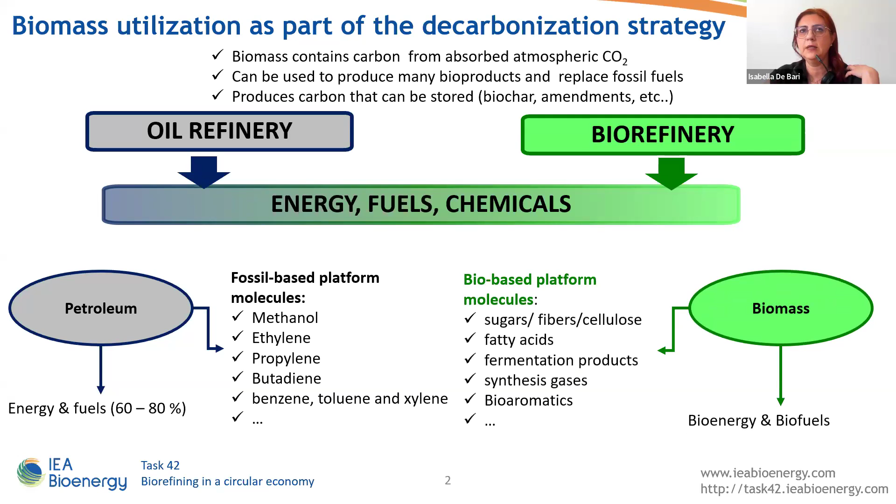In Europe, trajectories for biofuel derive from the Renewable Energy Directive and include the replacement in 2030 of 29% final energy consumption in the transport sector with renewable energy, with a share of 5.5% biofuel and 1% renewable fuels of non-biological origin, namely synthetic fuels produced from hydrogen.

Two EU regulations, the ReFuelEU Aviation and FuelEU Maritime, set also ambitious targets in terms of fossil fuel replacement and reduction of emissions. A similar push to increase the renewable carbon in chemicals and materials derives from the Green Deal targets, namely 20% of renewable carbon in chemicals and plastics.

Globally, approximately a quarter of renewable electricity generation would be used to produce the green hydrogen, around 200,000 kilotons per year needed by 2050. Hydrogen is included in many national strategies to decarbonize the industrial and civil sectors and also for green mobility. Considering the huge amount of hydrogen currently needed in the oil refinery, the use of hydrogen as chemical reactant could be similarly considered in biorefineries to convert many renewable carbon sources.

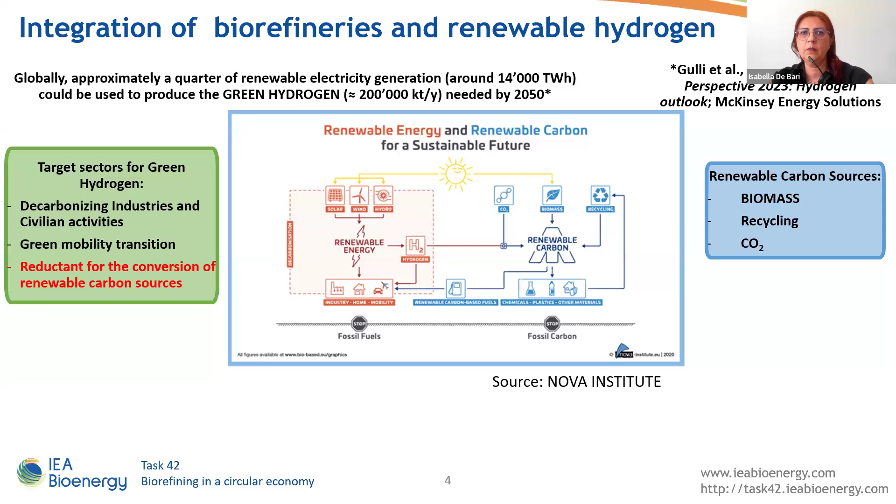One main issue in the decarbonization strategy through hydrogen is obviously the economic sustainability of the hydrogen production, storage, and transport costs. The major part of the hydrogen currently used in the industrial sector is produced through the steam reforming of methane, with a cost around €2 per kilogram. The combination of different electrolyzers with different sources of renewable electricity offers some options to produce green hydrogen with cost of at most 2 times higher than hydrogen from steam reforming.

Biohydrogen can be produced from biomass through many thermochemical and biological pathways, with production costs ranging from €3 to €6 per kilogram, depending on the final purity level. But if biomass can be a source of hydrogen, more interestingly, biomass and biomass-derived streams can be converted to many final bioproducts and downstream products by using green hydrogen, similarly to what's substantially happening in oil refineries. In fact, biomass contains 35 to 40% oxygen, and green hydrogen can act as a reactant to reduce the oxygen content, mainly through hydrodeoxygenation processes. One major question is in what condition the use of hydrogen in biorefinery can be sustainable.

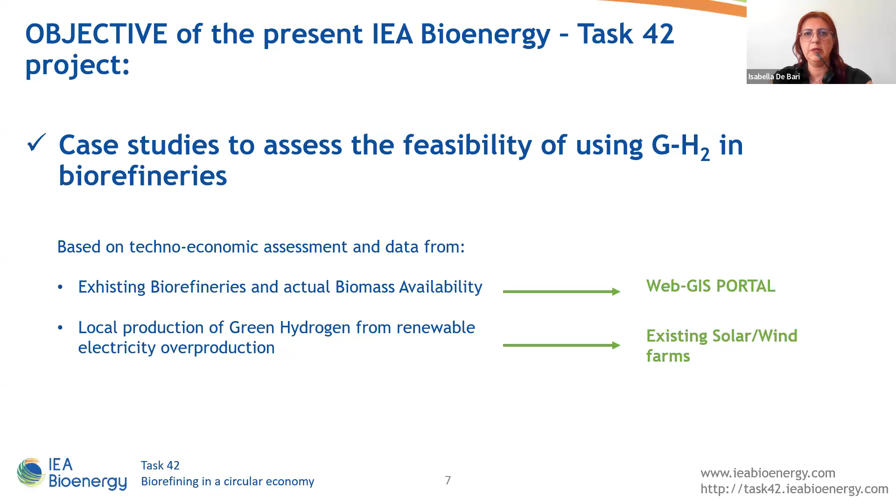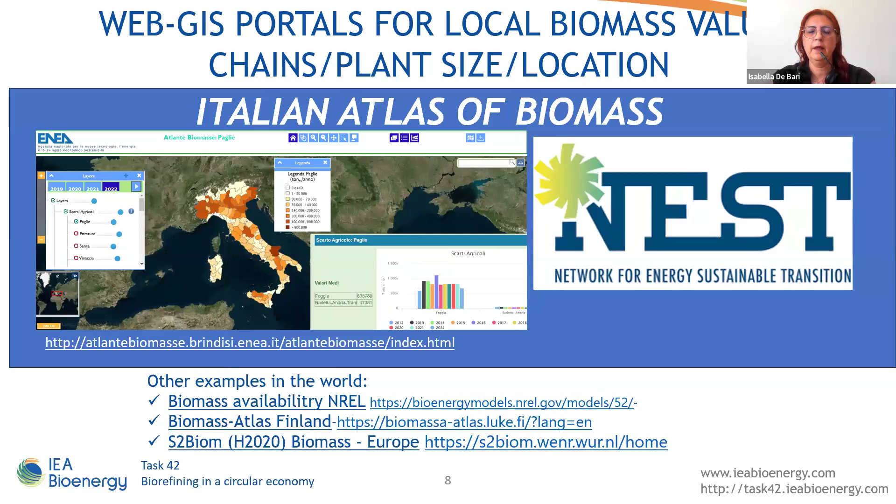The methodology we have developed is based on techno-economic assessment, and data were retrieved from web-GIS portals of existing biorefineries and the local biomass availability, together with the local production of green hydrogen from solar and wind farms. Several web-GIS national portals are available that could provide data on the local biomass supply chain for existing biorefineries or potential future plants. The global biorefinery portal that will be presented later in this webinar provides data on existing biorefineries: infrastructures, technologies, plant sites, location, feedstock, and product, and finally the status of operation.

1,119 plants are currently mapped in the web portal, and 76% are bioenergy, biofuel-driven biorefineries. At the moment, only 9% of the biorefineries based on chemical technologies in the database use hydrogen. So in conclusion, key elements of this webinar are: a georeferenced biorefinery database could be a dynamic observatory containing useful data to monitor these sectors and also to support the assessment of novel technological scenarios.

The current items include 21 plants using hydrogen as reactant, with sizes ranging from 200 to 1,000 kilotons per year, mainly HVO and SAF, and with a draft estimation of hydrogen requirement in the range 300-600 kilotons per year. Based on the biofuel trajectory at 2050, green hydrogen needed to produce drop-in biofuels and hydrogenated biochemicals would be at least 20-30 times higher than the current estimation for the plants included in the database.

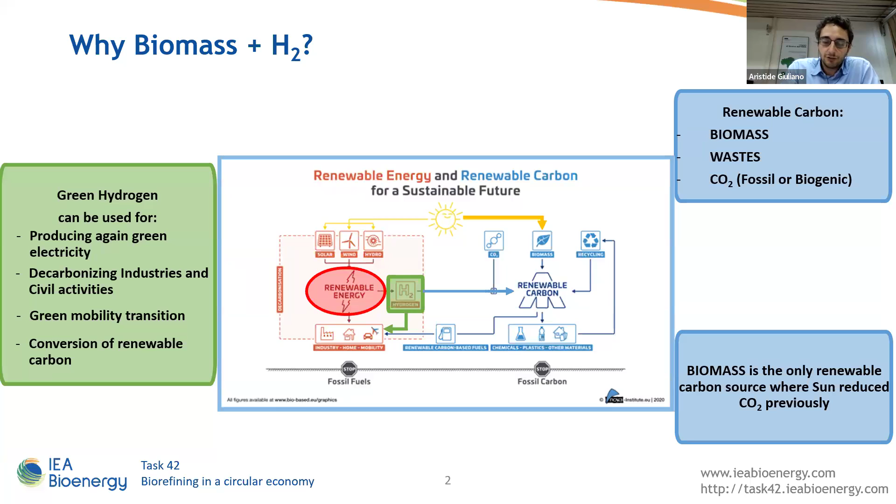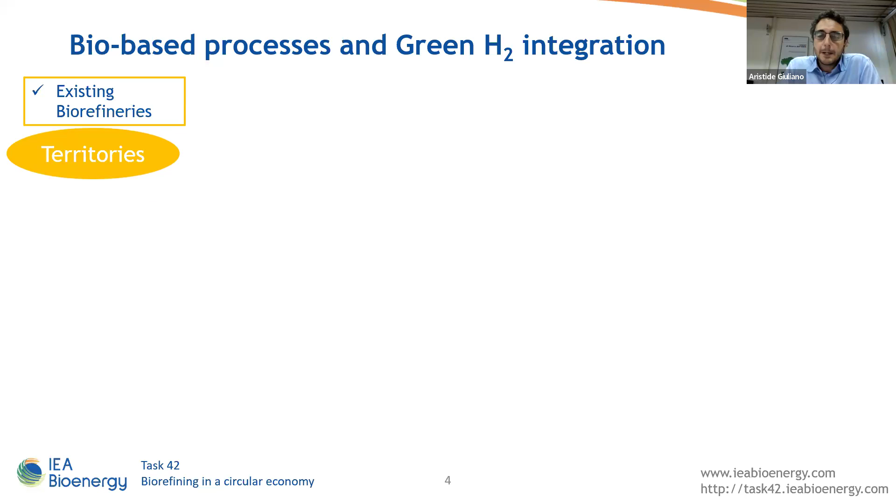The special project aims to assess potential integration between bio-based processes and green hydrogen production using variable renewable energy during the overproduction hours. About the methodology we used, starting by identification of existing or under construction biorefineries, the technology assessment was useful to estimate the CapEx and OpEx of the plant and also the green hydrogen requirement. So, how much green hydrogen do I have to produce locally in the selected territory by using the available renewable sources? And what is the green hydrogen production cost to supply the biorefinery, considering production, storage, and hydrogen transportation costs?

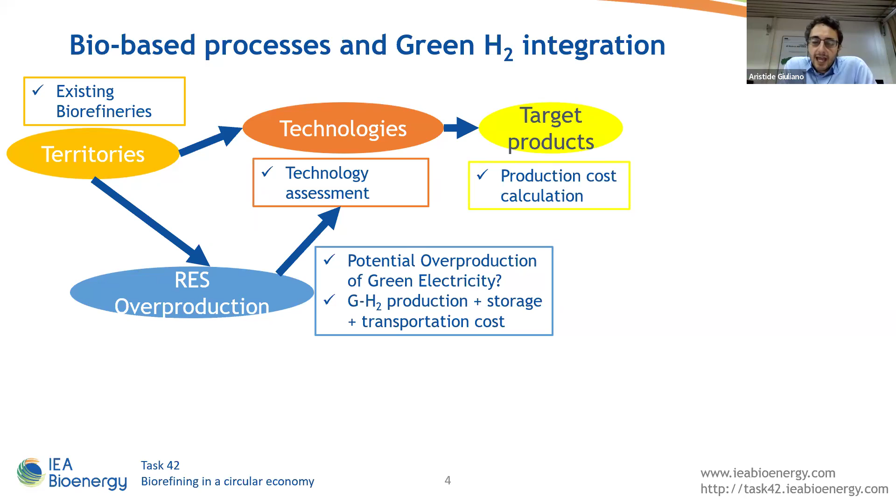Finally, by matching all of these costs, we can estimate the final product production cost, and so the potential impact of the green hydrogen supply cost on the total product cost. An important aspect is considering also the green hydrogen transportation cost from wind or solar farms to the biorefinery.

To calculate the green hydrogen cost, we used prospective data from literature. In particular, we divided costs for production of hydrogen, hydrogen storage, and hydrogen transportation, considering three alternative options: compressed hydrogen or liquefied hydrogen for the storage, and transportation by a new dedicated hydrogen pipeline or compressed hydrogen transported by truck.

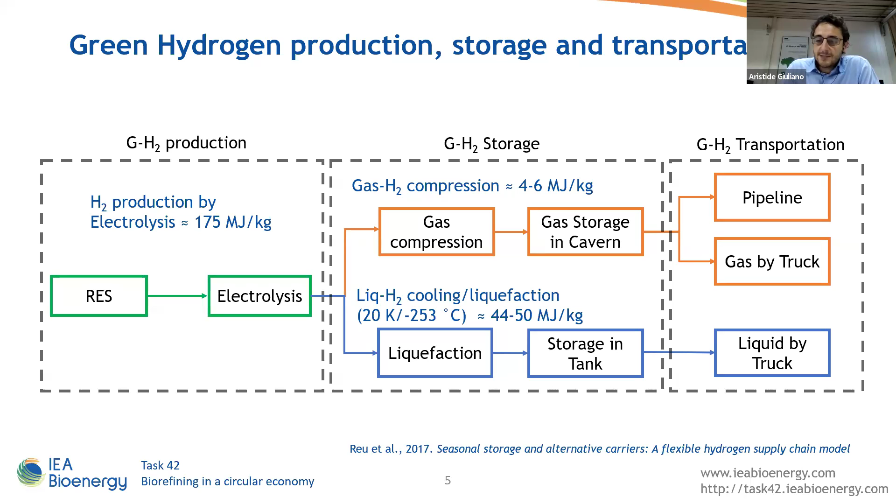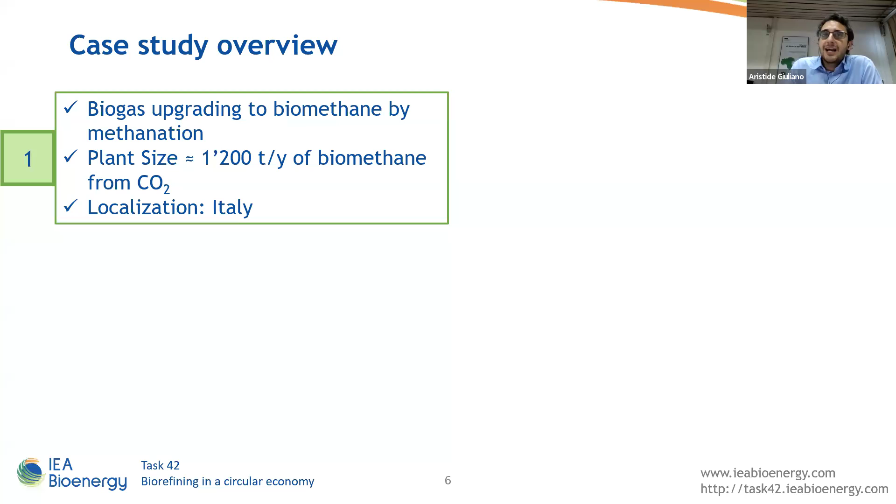A case study overview. The first one was for two small biogas upgrading plants in Italy, producing biomethane, using green hydrogen for the catalytic methanation process. The second one in USA for the production of 550 kilotons per year of renewable diesel using vegetable oils and other lipid sources as feedstock.

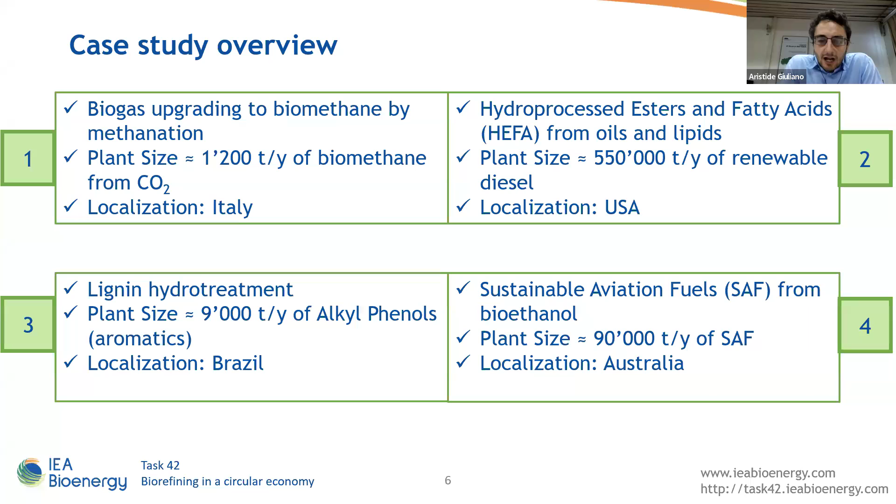The third one, the potential direct lignin hydrodeoxygenation producing now 9,000 tons of phenols and other aromatics, coupling that to a second generation ethanol biorefinery in Brazil. And the last one, sustainable aviation fuels production from bioethanol for a biorefinery under construction located in Australia.

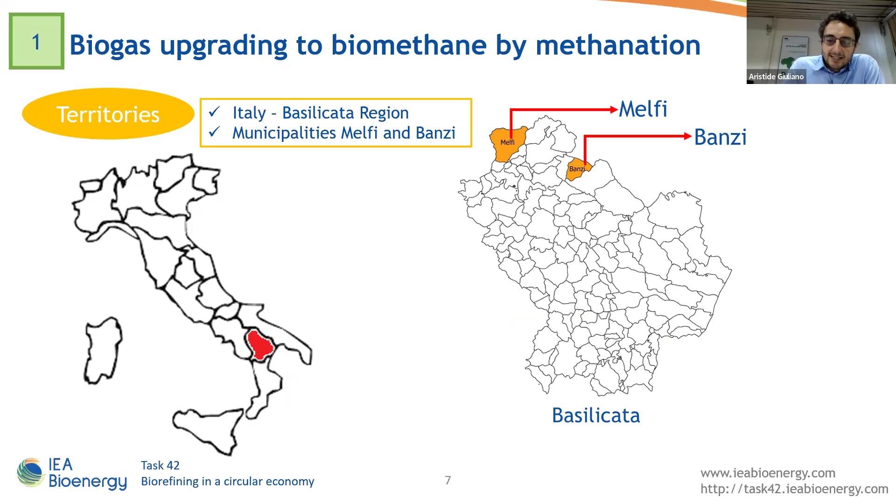So quickly, for the biogas upgrading by methanation, we chose two typical size biogas plants, one in Melfi and one in Banzi, in Basilicata region in southern Italy. About the technology, we assessed a techno-economic analysis starting from a purified biogas derived from the anaerobic digestion, obtaining 150 kilogram per hour of biomethane, purified by a conventional membrane technology. To make that, 72 kilogram per hour of green hydrogen were necessary.

So we have about a half kilogram of hydrogen per kilogram of biomethane produced, and a production cost without considering the green hydrogen of about 0.2 euro per kilogram, but we need 0.5 kilogram of hydrogen per kilogram of biomethane. So where can we find it?

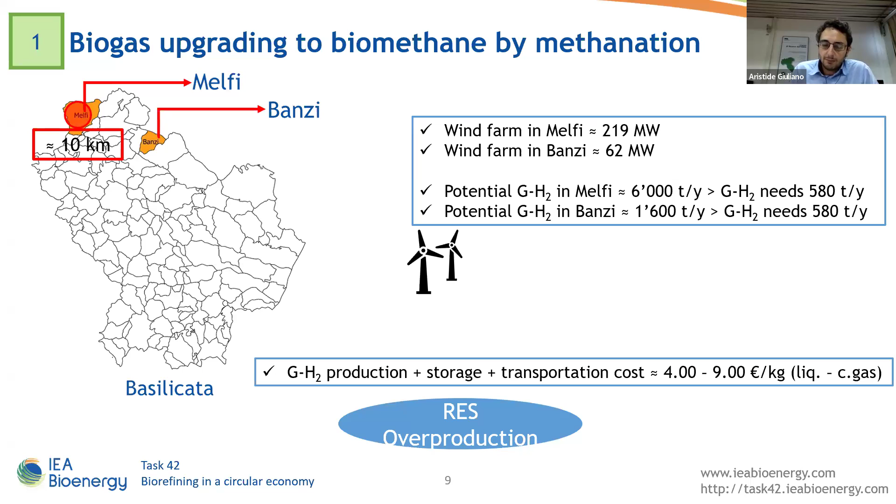There are these capacities of the wind farms in Melfi and Banzi, and they assure overproduction of renewable energy in both municipalities. So we can consider a potential green hydrogen production of 6,000 tons per year in Melfi and 1,600 tons per year in Banzi. These values are higher than the green hydrogen requirement of the methanation plants. So this matching between a local bio-based process and potential green hydrogen is feasible. And with more or less 10 kilometers for the distance between biogas plants and the wind farms, a green hydrogen production, storage and transportation cost in a range from 4 to 9 euro per kilogram of hydrogen was calculated.

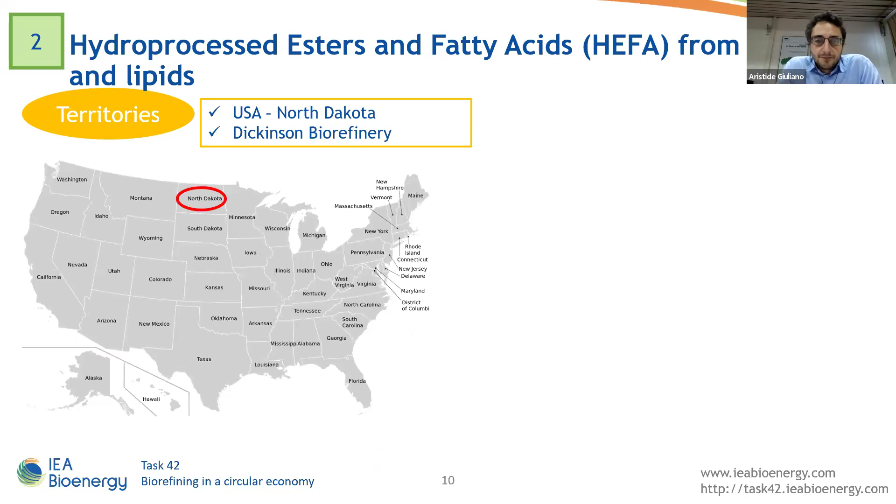In the second case study, hydroprocessed esters and fatty acid production from oils and lipids. For this case study, we chose from the Biorefinery Atlas a biorefinery in USA, in North Dakota, Dickinson, processing 700,000 tons of oils. The technology assessment was on the catalytic hydrogenation with the recovery of unreacted hydrogen and valorization of the purge gases producing electricity. A drop-in diesel can be obtained finally.

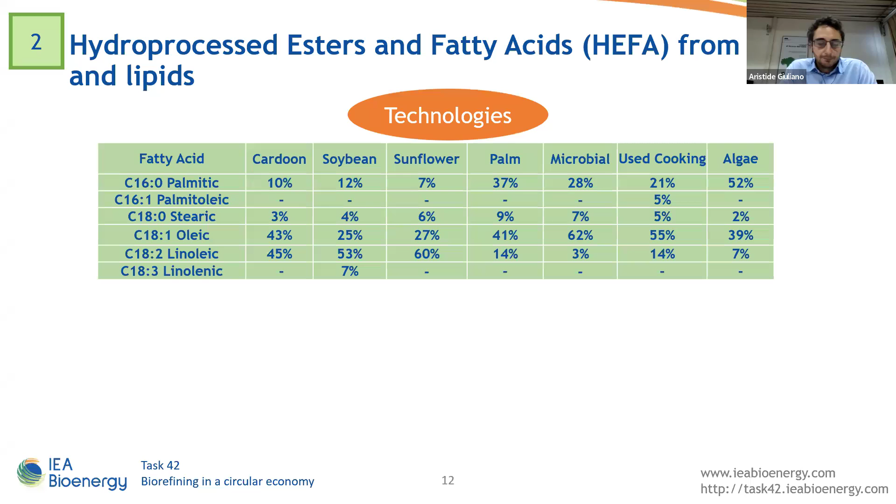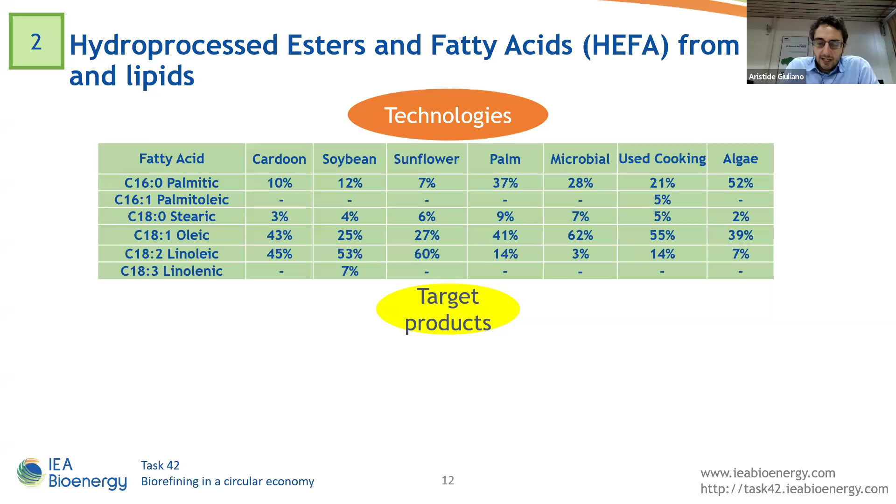Further, we studied the effect of 7 different feedstocks: common vegetable oils, microbial oils from a second-generation sugar platform, waste cooking oils, and lipids from algae. Really, the process performances didn't change a lot. So a medium final yield of 80% can run well, with a hydrogen requirement of more or less 5%, arriving to a green diesel production cost lower than €3 per kilogram, depending a lot on the raw material, the oil purchase price. This without the green hydrogen supply cost again.

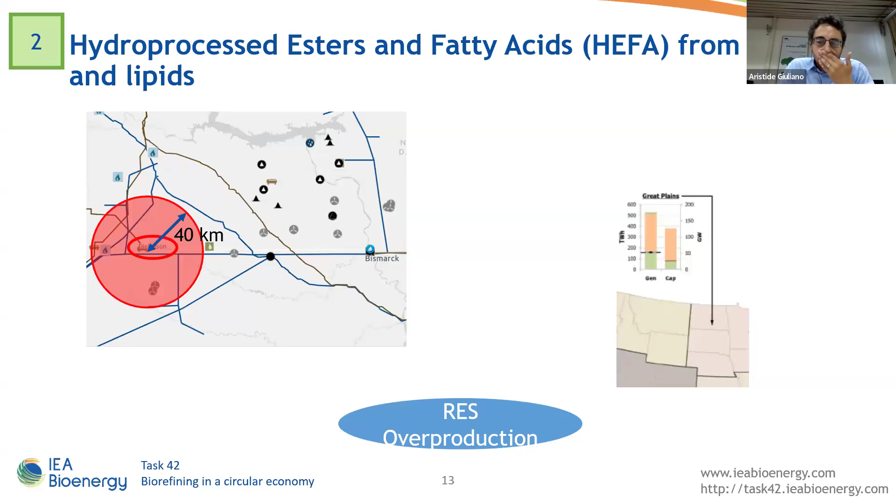So on the territory for the local integration, we know in North Dakota state the renewable energy sources are super abundant. So we can suppose the overproduction. In particular, there are 2 wind farms in a radius of 40 kilometers with a total capacity of 300 megawatts. From those we can get 21,000 tons of hydrogen per year, so less than the biorefinery needs. And so this matching is not feasible, unfortunately.

But you must not lose hope, because widening the distance range from 40 kilometers to 100 kilometers, we can push also the energy production from another 3 wind farms, producing globally 40,000 tons of hydrogen per year. And so, also in this case, we can consider the matching feasible at a higher cost for the transportation of green hydrogen, resulting in a final green hydrogen supply cost of more or less €2 per kilogram.

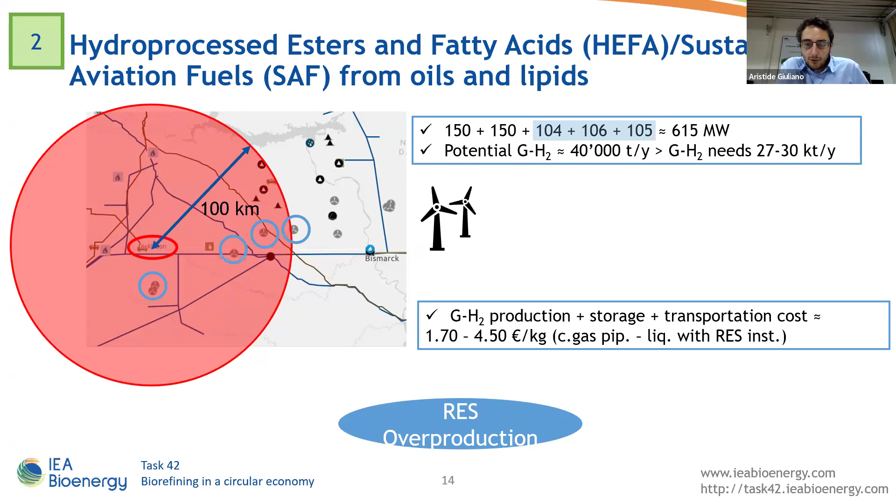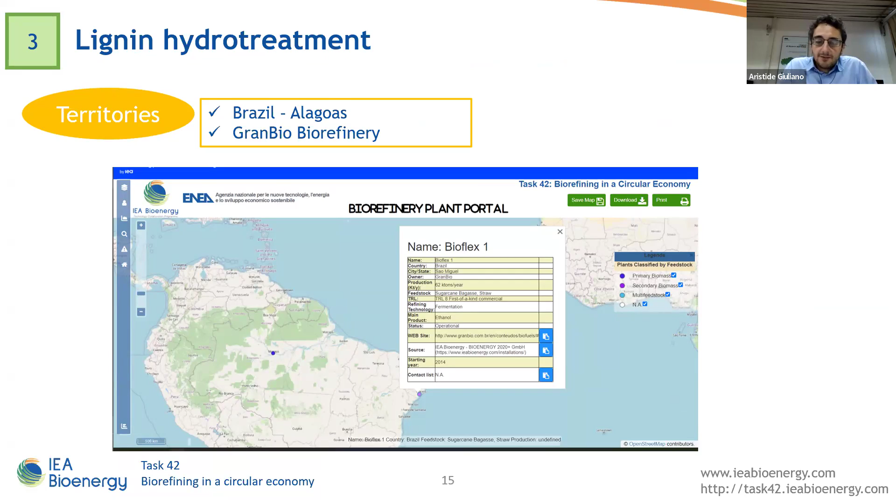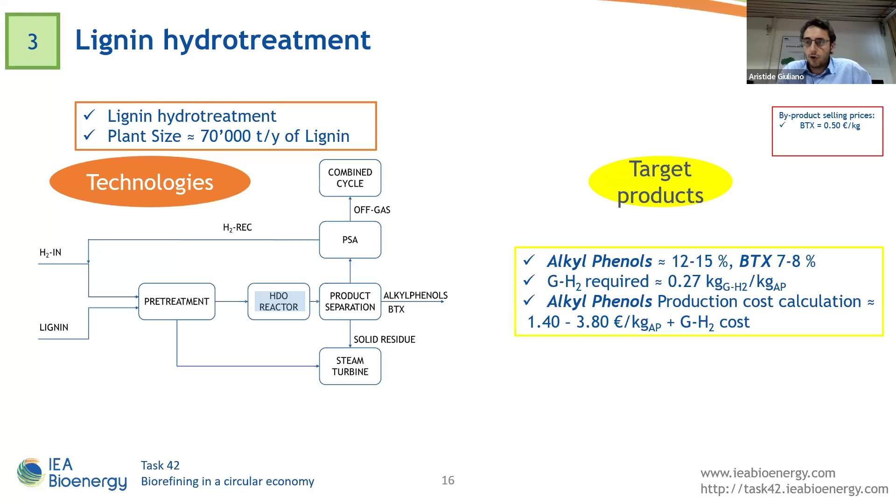About the third one, the lignin hydrotreatment. From the Biorefinery Atlas, we identified in Brazil a second-generation ethanol biorefinery, having as a waste about 70,000 tons per year of lignin. So we built a lignin process conversion by direct hydrodeoxygenation, obtaining alkylphenols and BTX aromatics. From process design and CAPEX and OPEX analysis, a final alkylphenols production cost of 1.4 to 3.8 euro per kilogram was found, without the cost of hydrogen again.

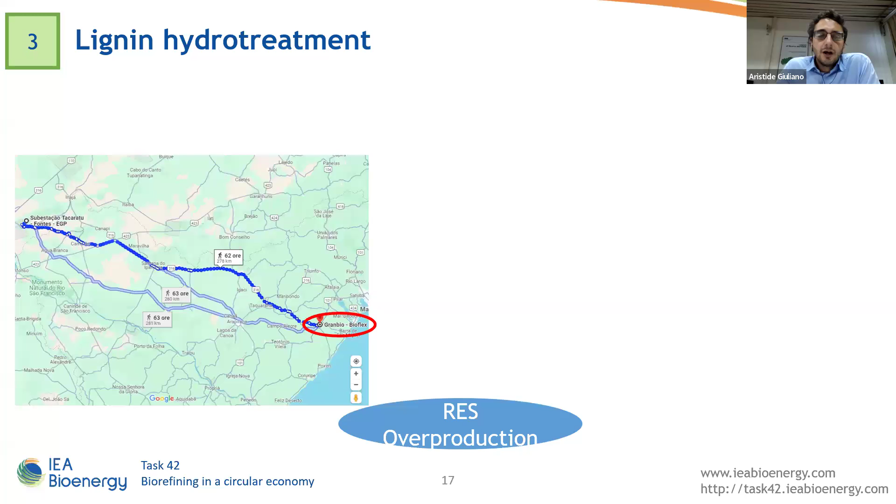In this case, a wind farm 300 kilometers far was considered with a capacity of 220 megawatt, producing potentially about 12,000 tons of hydrogen per year. And so, also in this case, the matching is feasible. The green hydrogen cost we calculated is in the range 2.8 to 5.4 euro per kilogram.

So the last one, an under construction project, Ulysses, from the Biorefinery Atlas in Australia, converting second-generation ethanol by dehydration, oligomerization, and hydrogenation to 90,000 tons per year of sustainable aviation fuels. In this case, a very, very low hydrogen requirement is necessary, only 0.01 kilogram of hydrogen for each kilogram of SAF, at a production cost lower than €3 per kilogram.

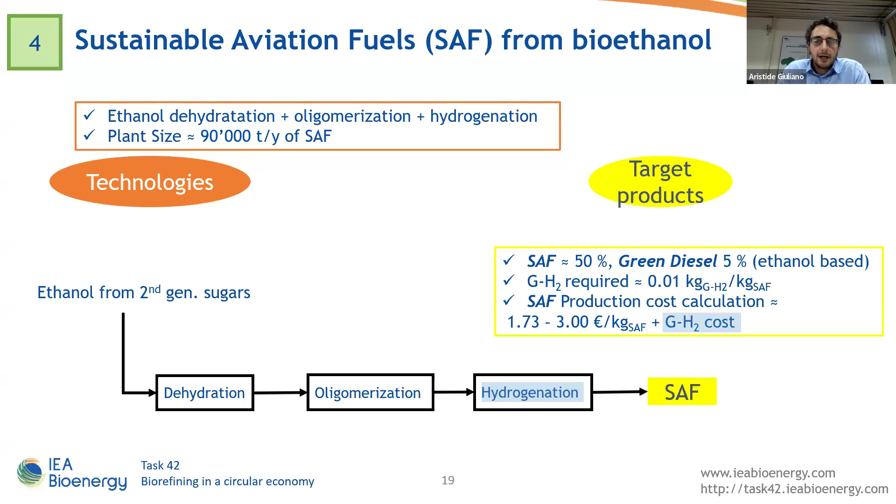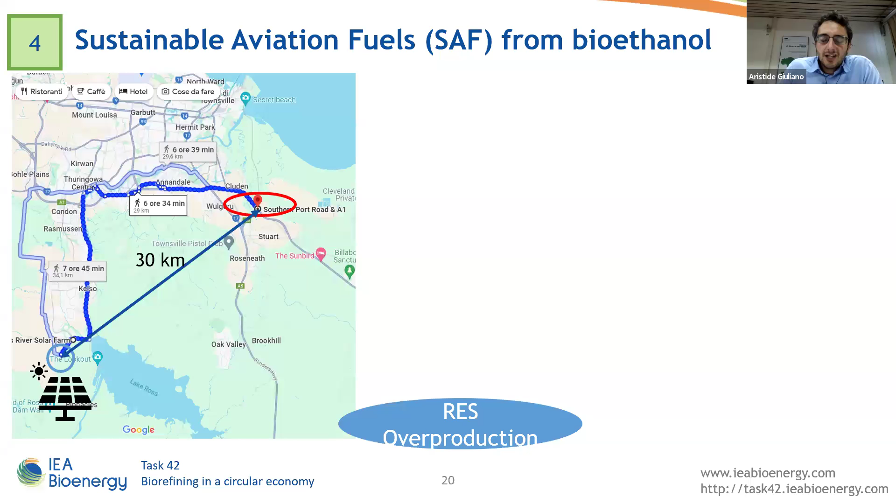The green hydrogen supply was considered thanks to a solar farm 30 kilometers away, producing potentially about 3,000 tons per year of green hydrogen, covering the small green hydrogen requirement. The case study for this local integration can be considered feasible, and the calculated green hydrogen supply cost was in the range 2.7 to 5.7 euro per kilogram.

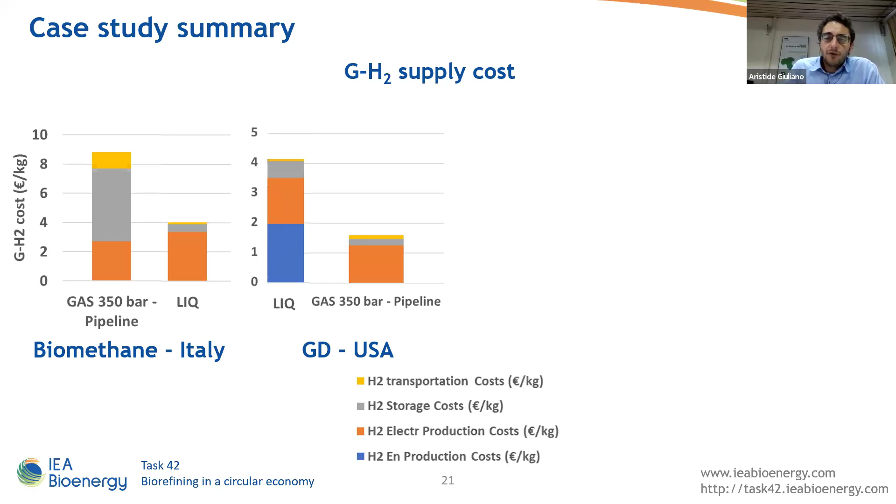So now we can summarize the case study results. In particular, the green hydrogen cost for the biomethane production was potentially the highest due to the small quantity of hydrogen to store and to transport, and so due to the economies of scale. Then in the USA case, to produce green diesel, also considering the wind farm installation cost, we can have a green hydrogen cost of about €4 per kilogram in perspective. The high quantity of hydrogen to feed the biorefinery allows us to consider the compressed hydrogen pipeline as the optimal one.

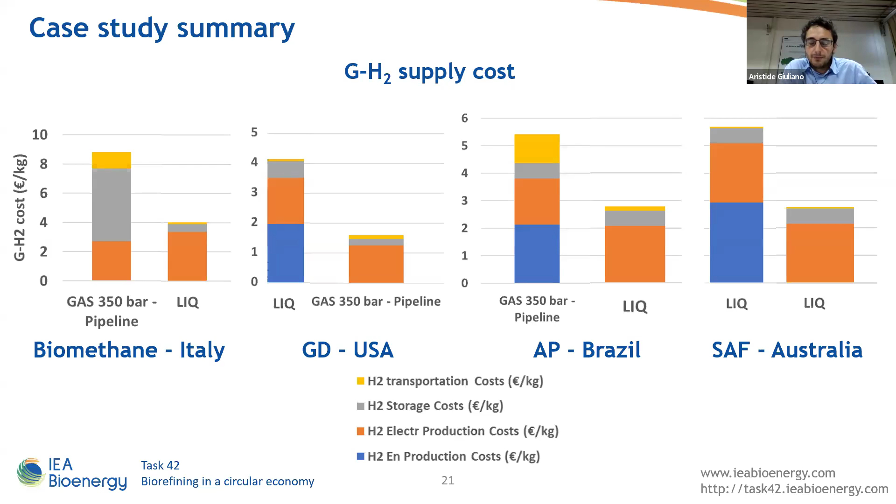Then, for the conversion of lignin from a second-generation ethanol biorefinery in Brazil, liquid hydrogen storage and transportation was found as the optimal choice. Finally, for the production of sustainable aviation fuel by an alcohol-to-jet process in Australia, liquid hydrogen could be transported to the biorefinery. Here, a summary of the specific requirement of hydrogen.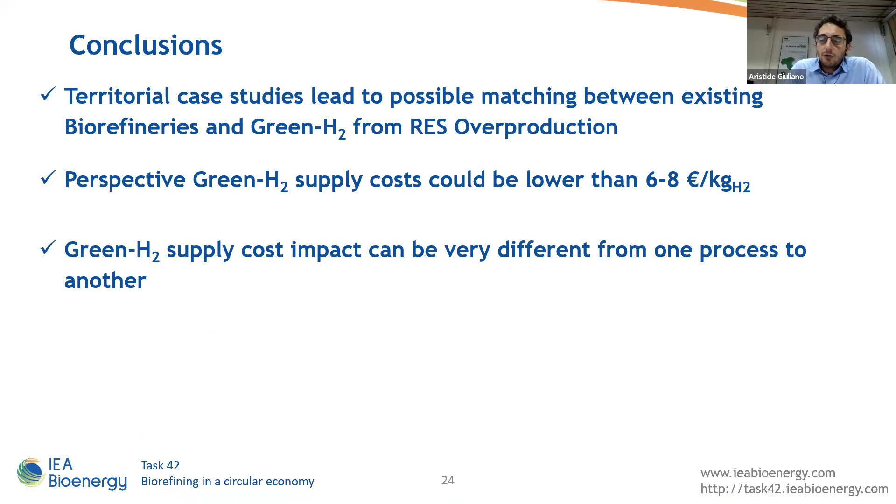Then we can calculate the impact of the green hydrogen cost on the final production cost, again high values for the biomethane synthesis. In conclusion, in this project, several case studies were assessed and potential matching between bio-based processes, existing biorefineries, and green hydrogen was established as feasible. For the local green hydrogen production, costs lower than €6-8 per kilogram were estimated, where a very different green hydrogen supply cost impact on the total production cost can be found changing the bio-based process, essentially.

Then we can assume that the local integration of biorefineries and green hydrogen could represent an optimal opportunity to make the hydrogenated bio-based products 100% renewable. In the future, also other case studies, biomass supply chain and green hydrogen supply chain optimization will be carried out, I think, during the next triennium program of the IEA Bioenergy Task 42.

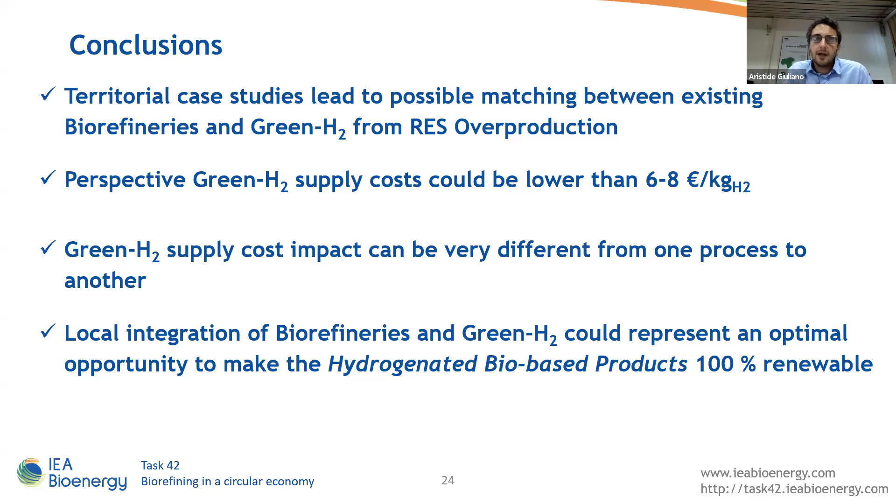And thank you. So, Nicola, the floor is yours. Thank you. Thank you, Aris. I'm sharing my screen. Do you see my screen? Okay. Just a second, please. Perfect.

Hello, everyone. I am Nicola Pierro, researcher at ENEA, and I'm going to present the IEA Bioenergy Task 42 web-GIS portal Global Biorefinery Atlas. But first, what is a biorefinery? According to Task 42, a biorefinery is the sustainable processing of biomass into a portfolio of marketable bio-based products, food, feed, chemicals, and bioenergy. There are many typologies of biorefineries.

Energy or biofuel-driven biorefineries, where biomass is primarily used to produce biofuels, power, and/or heat, and processed residues are sold or even further upgraded to value-added bio-based products. And the product-driven biorefineries, where biomass is typically fractionated into a portfolio of bio-based products, with the focus being to derive the highest economic value. The residues generally are used for power and/or heat production.

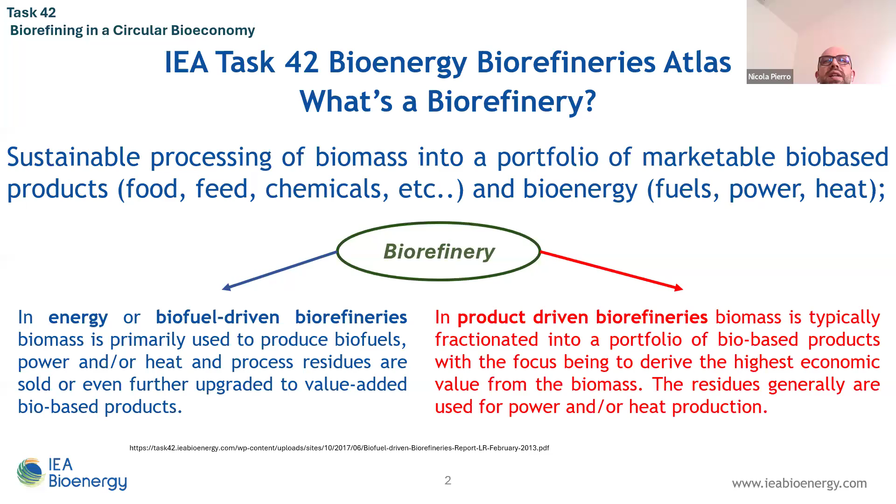The idea of creating a database on biorefineries dates to the triennium 2016-2018, where within the work on bioeconomy and biorefinery strategies in the EU member states and beyond, there was a task concerning the assessment of biorefineries in Task 42 member countries. A survey was created and submitted to various stakeholders. The actors involved in this activity were the Joint Research Centre of the European Commission, the Bio-Based Industries Consortium, now called Circular Bio-Based Europe, and the IEA Bioenergy Task 42. This work allowed the census of 62 plants divided into commercial plants, demo pilot plants, and flagship plants.

In the past triennium, it was decided inside Task 42 to dedicate an activity aimed at creating a harmonized database of biorefineries from data deriving from the various databases, and its publication and sharing through a web-GIS portal. There are several databases regarding bio-based industries, biofuel plants, and biorefineries available online, but they aren't harmonized with each other due to different classifications applied, different names of processes, etc. The main scope of this activity was to harmonize this data. The web-GIS portal was made public at the end of 2022.

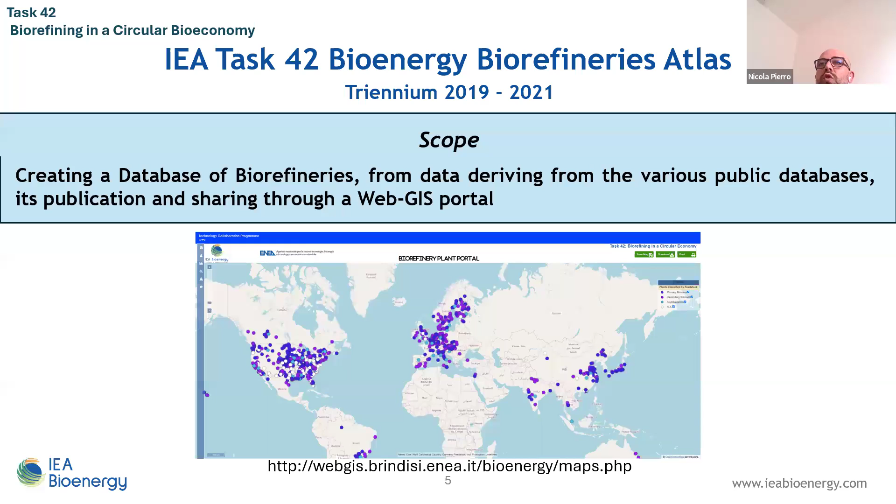First of all, we started with the analysis of databases available online, like the National Biorefinery Database and integrated biorefinery maps elaborated by the Department of Energy of the United States, the JRC Biorefinery Industries and the Biorefineries Distribution in Europe, available through the Data M portal of the JRC, the BBI biorefinery maps elaborated for Europe by Nova Institute in 2017, the IEA Bioenergy Database elaborated by Task 39, the Biofuel Digest Database, and other European, international, and national projects.

From the analysis of these websites, a database structure was elaborated where the information connected were the name of the plant, the country, the city, the owner, the production capacity, the TRL, the feedstock, the products, the refining technology, the status of the plant, the starting year, the source of the information, and the geographical coordinates of the plant. In order to classify this information, it was decided inside Task 42 to apply the classification elaborated under the European project EU Biorefinery Outlook to 2030.

In this classification, biomass is divided into main classes, primary biomass and secondary biomass. In each class, there are several categories. For example, for primary biomass, there is aquatic biomass, lignocellulosic from cropland and grassland, and so on. For conversion process, we have a biochemical class, chemical class, mechanical and thermomechanical, thermochemical class, and for product, there are chemicals, materials, food, animal feed, and energy.

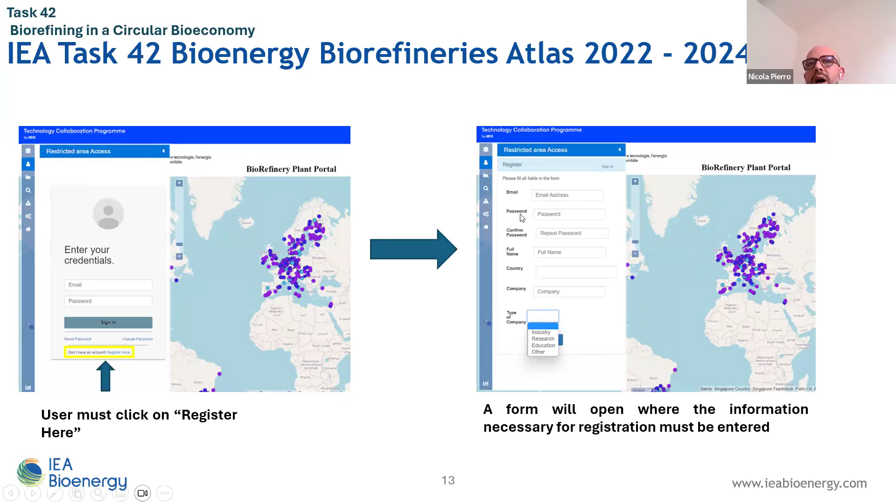Users who want to use these new tools will have to register to the portal. The new version of the web-GIS will be made available by the end of this year. Users who want to register on the portal will have to click on the highlighted tool. A pop-up window will open where the user must click on register here. A form will open where the information necessary for the registration must be entered. The mandatory information will be the email, password, and confirm password.

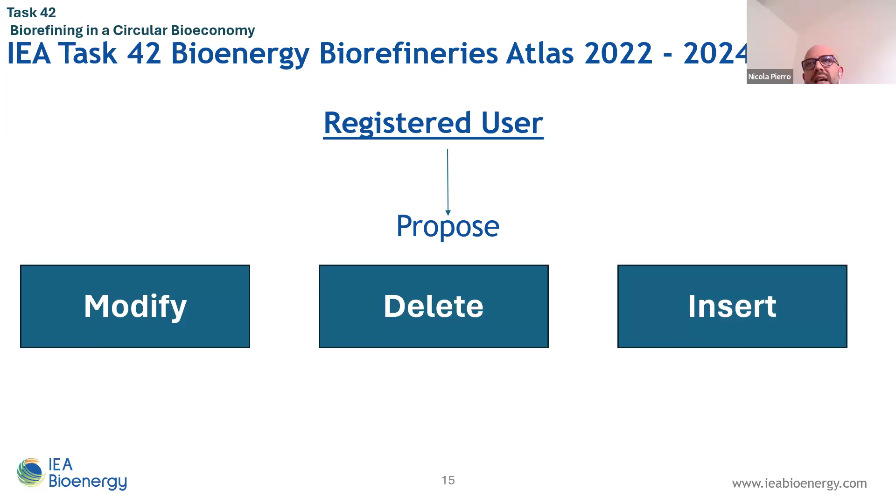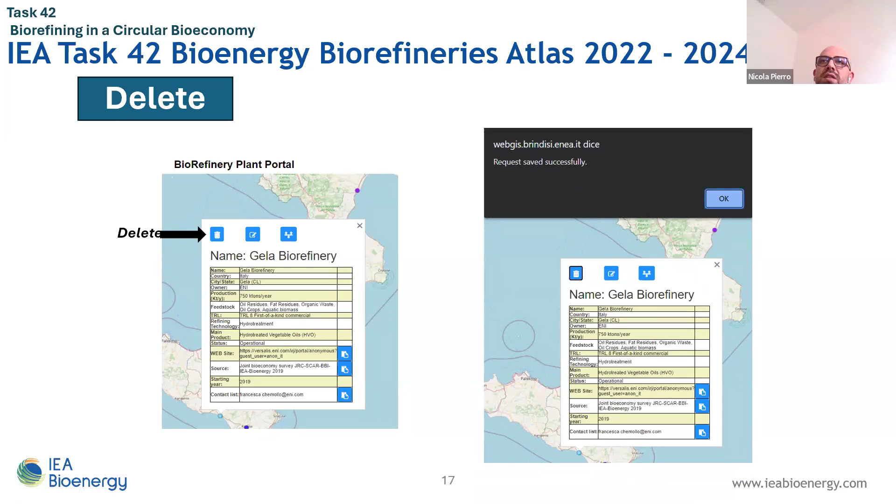If a user would suggest to delete a plant, she will have to click the specific tool. The system will store the request, which will be evaluated by the administrator of the web-GIS, that will be the national team leader of Task 42. The same for the tool modify. By clicking on the specific tool, a window will appear where all information associated to the plant is reported. After changing the information, by clicking send, the proposal is sent to the administrator.

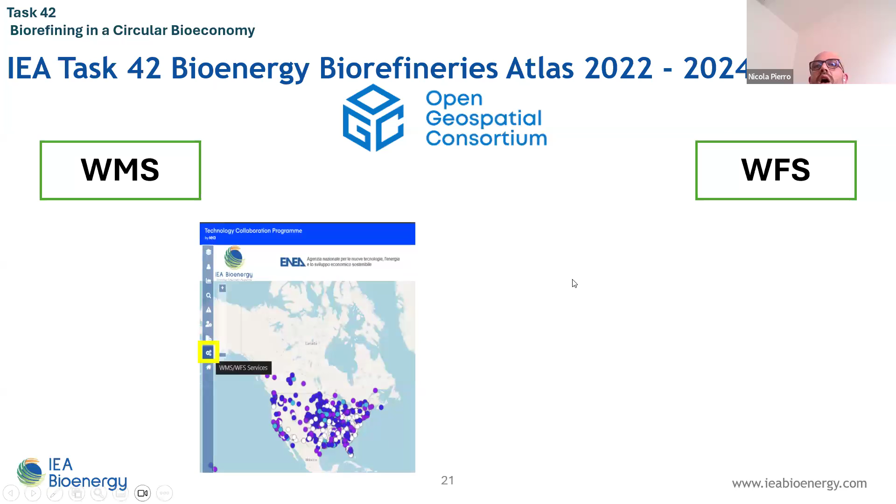Another service that will be added to the portal will be the Open Geospatial Consortium service. It is an international consortium of experts which defines the standards to be used in sharing geospatial data. In particular, the services added to the portal will be the web map service, which is a standard protocol through which users can request georeferenced images, a raster, via internet, and the web feature service, which is a standard allowing users to directly request geographical objects, not a map like the web map service, which can be selected, queried, and so on. This service will be available by clicking on the highlighted tool. A window will appear where the user can copy the web map service link or the web feature service link.

In order to guide users in these new tools, a guide in the form of a PDF flipbook and a video tutorial will be added to the portal in a specific tool.

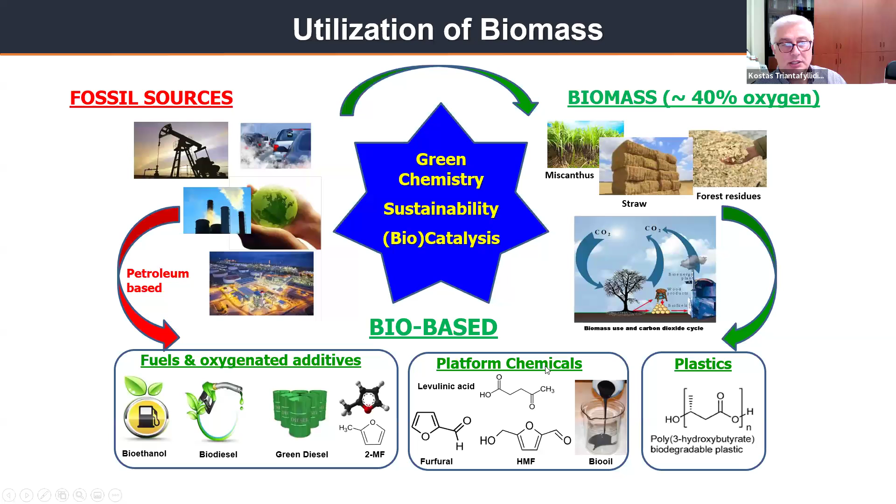Today I will give some examples of catalytic hydrogenation processes that are being applied in biorefineries towards value-added bio-based chemicals and fuels. We had some introduction about biomass, and everybody knows that biomass has a lot of oxygen. So in order to produce purely hydrocarbon fuels, like from petroleum resources, we start by losing 40% of the feedstock. Of course, there are not only hydrocarbon fuels, but also oxygenated fuel additives like the compound I'm showing down here, which is the 2-methylfuran. And we can also produce some oxygenated chemicals that can be used for making polymers and plastics.

In order to have a sustainable valorization of biomass and to be competitive with the petroleum-based products, we need to apply as many as possible of the 12 principles of green chemistry that Paul Anastas and John Warner introduced a few years ago. To name some, develop atom and energy efficient conversion technologies. And here comes, for example, the utilization of the excess renewable electricity to produce green hydrogen, as we heard previously. Of course, develop integrated biorefinery concepts, and by integrated biorefinery, we mean to be able to valorize the whole biomass, and not just fractions, just the cellulose or the lignin or the hemicellulose. And here, hydrotreatment processes, as you will see later on, play an important role as they regulate the oxygen content of the fuel and chemical products.

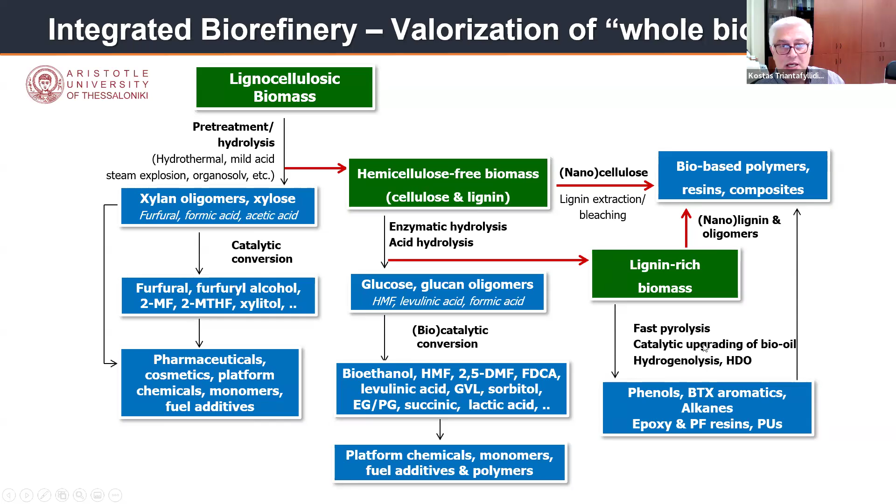Now, in our group, in Aristotle University of Thessaloniki, the last 10 or 15 years, we have been developing an integrated biorefinery, focusing mostly on the selective fractionation of biomass. We try to apply neat green processes to separate the fractions of biomass. Initially, we separate the hemicellulose fraction, and we do different downstream processes to produce furfural, furfuryl alcohol, and other useful compounds. Then we work on the cellulose and lignin enriched biomass, where we convert cellulose to glucose and then downstream processes of converting glucose. And with lignin, we do different stuff, working directly on lignin as a polymer additive, for example, or by depolymerizing lignin to lignin bio-oils, and then doing some other processes for making fuels and chemicals. And here you can see that hydrotreatment is in most of the downstream treatments, as I'll show you later on, along with other catalytic processes like hydrolysis, pyrolysis, condensation, and so on.

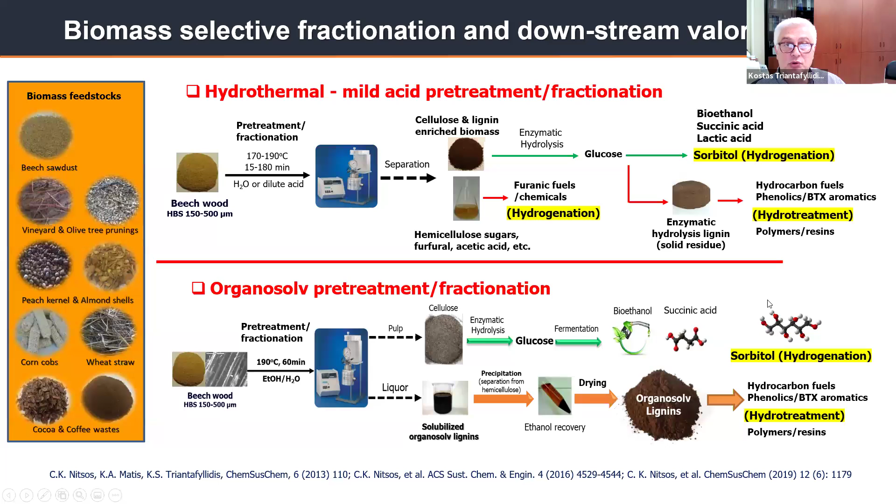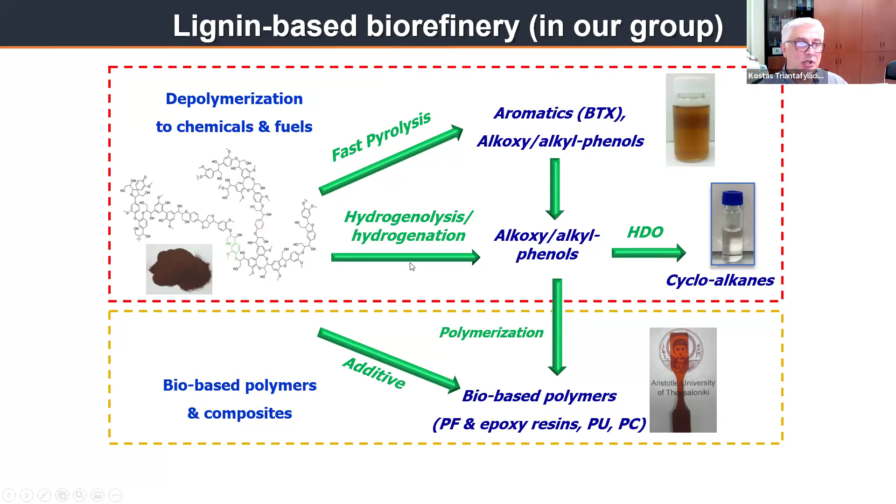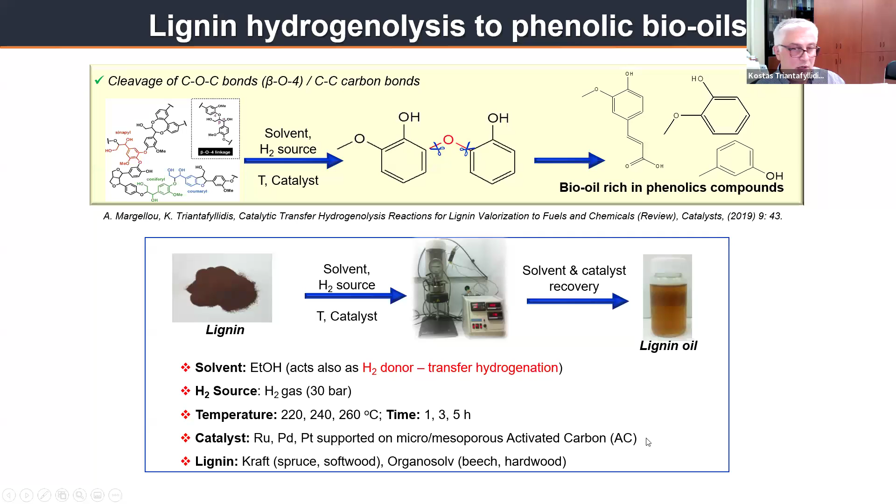Lignin hydrogenolysis is a relatively mild process, a liquid phase process at low temperatures, about 250 degrees Celsius. Usually, a solvent acting as a hydrogen donor, like ethanol or isopropyl alcohol, is used to induce transfer hydrogenation. The aim here is to break the ether bonds in lignin and get a bio-oil rich in phenolic monomers or oligomers. The catalysts are typical hydrogenation catalysts like ruthenium, palladium supported on activated carbons, which are very robust supports. Here we see some data on the hydrogenolysis of Kraft lignin, which is a quite recalcitrant lignin.

As you can see here, when we move to organosolv lignin, which is a more reactive lignin, and when I'm saying more reactive, I mean it has more ether bonds, β-O-4 bonds, you see how the monomer yields increase from about 15 to about 30%.

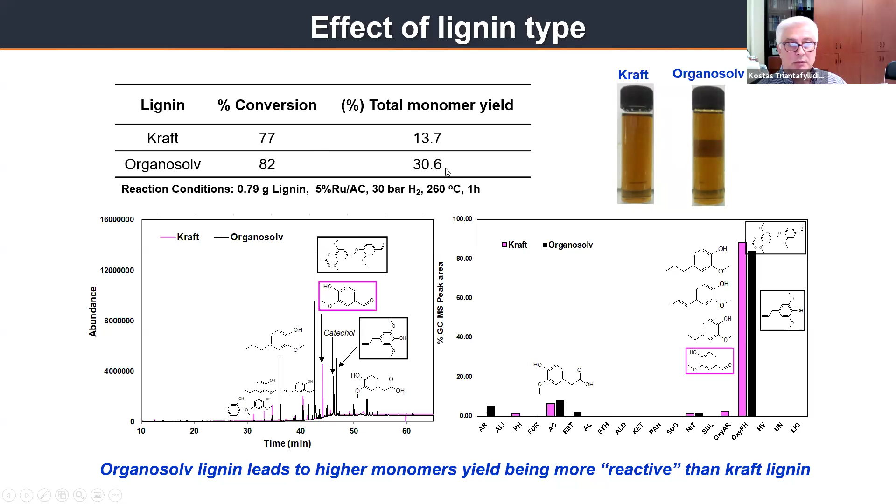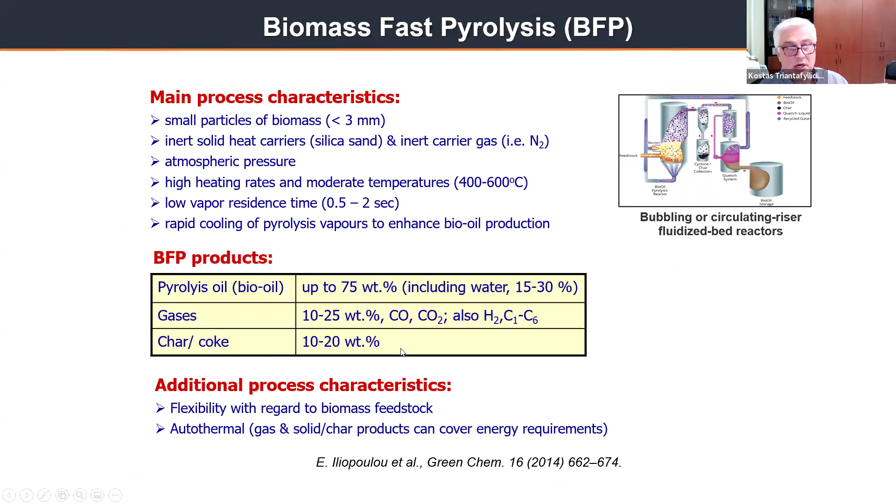Now, biomass fast pyrolysis, a neat process, a nice process to convert biomass to bio-oil: fast heating of biomass, fast cooling of the vapors to increase the liquid products, the pyrolysis oil, and minimize gases and charcoal as much as possible. If you pyrolyze biomass, then the bio-oil is a very complex mixture of acids, furans, ketones, phenolics, and this makes it quite unstable, acidic, not miscible with petroleum fuels, and of course needs direct upgrading.

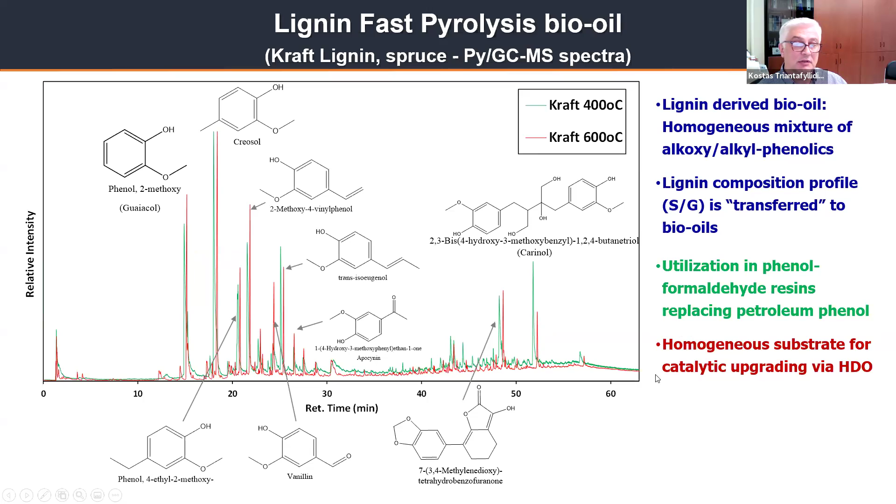However, if you pyrolyze lignin, the isolated lignin, then your bio-oil is more homogeneous and it contains mostly alkoxy and alkyl phenolics. These bio-oils can be and have been tested as a replacement of phenol in phenol formaldehyde resins, but also are a more homogeneous substrate for catalytic upgrading via hydrodeoxygenation processes. And to this end, we have done a lot of work both on model compounds as well as on real pyrolysis and hydrogenolysis lignin oils.

For example, here is an optimization on the most simple phenolic, the phenol, with bifunctional nickel zeolite catalyst. We prefer to work with bifunctional catalysts and not the classical sulfide catalyst, the NiMo alumina catalyst. And you can see down here the mechanism. First, the hydrogenation leads to the cyclohexanone, and then further hydrogenation to cyclohexanol. Then the acidic support works here to have the dehydration towards the cyclohexene, and then again hydrogenation on the nickel to produce the final cycloalkanes.

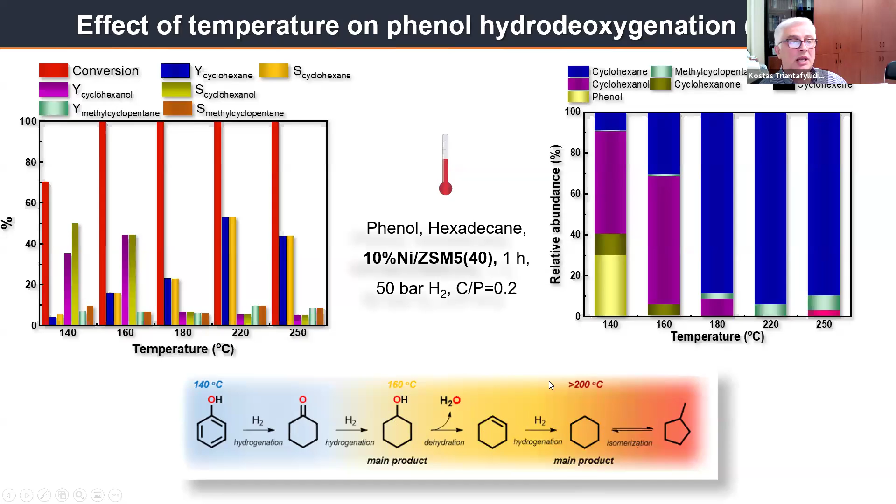If we go to more complex feedstocks like light fraction surrogate, light lignin bio-oil fractions having these compounds inside, we can succeed again, very high hydrodeoxygenation degrees, high yields of cycloalkanes. The distribution of products is between C6 and C9.

And some simple calculations here, you can see that we consume about 11 grams of hydrogen per 1 kilogram of bio-oil surrogate treated. And we talk here about 90% conversion of phenolics and 50 bar initial hydrogen pressure. So this means that we started with about 14 grams of hydrogen per kilogram of bio-oil, and the outlet was 2.7 grams of hydrogen, meaning that we consume about 11 grams of hydrogen per kilogram of bio-oil.

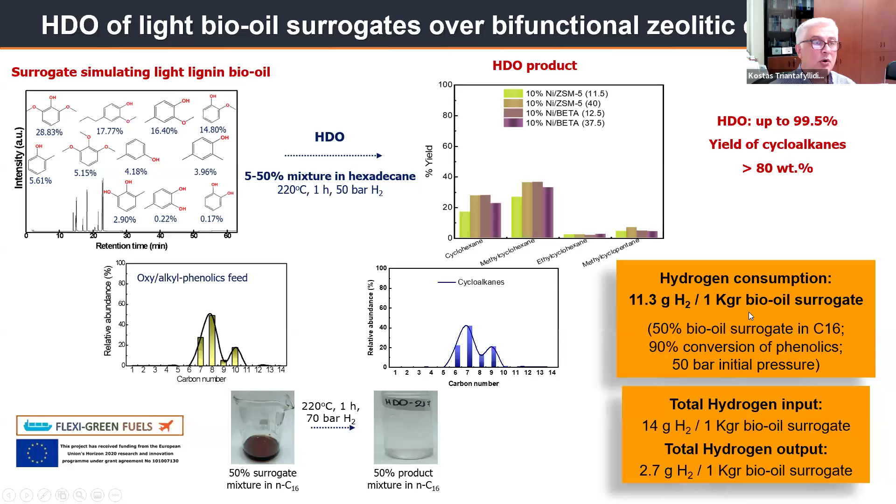Now let's pass to the hemicellulose fraction, and more specifically to furfural valorization. The hemicellulose fraction usually gives us xylose from most of the woods, and then xylose can be dehydrated to furfural. And if you look at this scheme here, furfural is a very important platform chemical. It can give subsequent secondary platform chemicals, and finally monomers for polymers, fuel additives, solvents, a wide variety of chemicals.

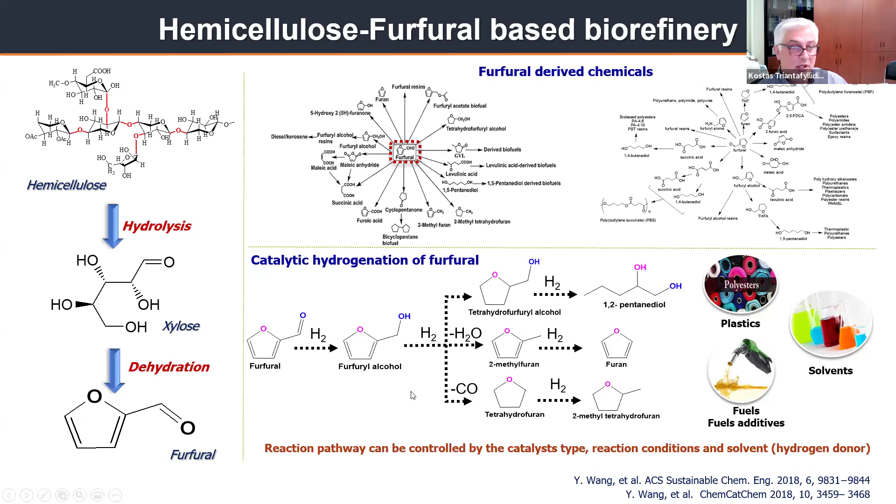And then again here, hydrogenation is probably the preferred process to go through with furfural. You see at the first step, furfural is hydrogenated to furfuryl alcohol. Furfuryl alcohol resins these days are very important resins, trying to replace PF resins and other resins. And then depending on the catalyst, the reaction conditions and the solvent, you can see that we can have different reaction paths to different important products. For example, 2-methylfuran as a fuel additive, tetrahydrofurfuryl alcohol, 1,2-pentanediol as a monomer for making plastics, and several other very nice chemicals.

If you want to go towards complete hydrogenated products, you increase the hydrogen initial pressure. Quickly, let's go to glucose now, to cellulose valorization. And here, everybody knows that the second generation biorefineries and biofuels focused on the conversion of glucose from cellulose via fermentation to ethanol, but we can do also chemocatalysis on glucose, like hydrogenation of glucose to produce sugar alcohols like sorbitol and smaller ones, ethylene glycol and propylene glycol, with the appropriate catalysts.

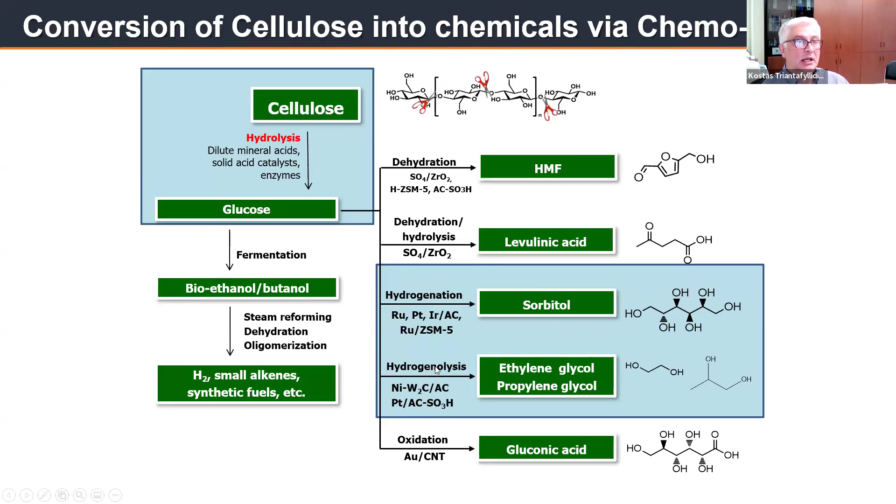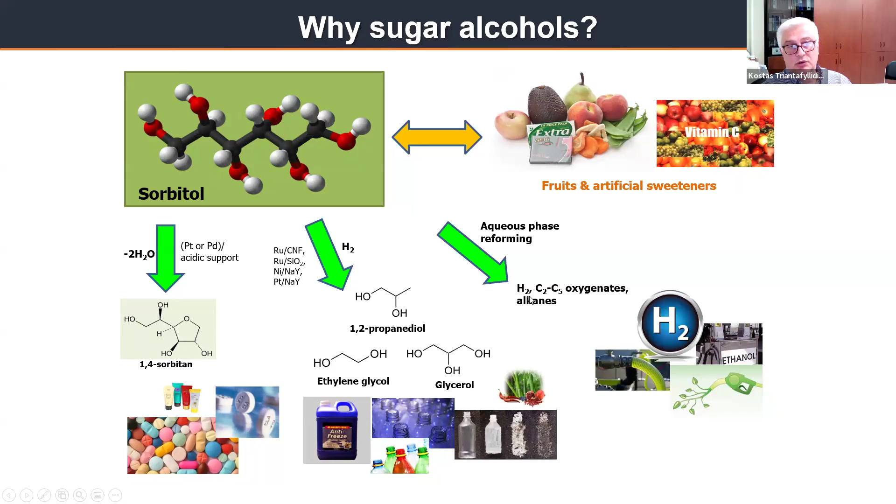Why sugar alcohols? Of course, sorbitol, everybody knows, it's a sweetener. It can be used in many food products. Via dehydration, it can produce sorbitan, a very important chemical to make pharmaceuticals and polymers. Via hydrogenation, it can produce very important monomers for making plastics, but it can also produce hydrogen via aqueous phase reforming.

Now, the simplified reaction mechanism is the hydrogenation of glucose to sorbitol initially, and then inevitably, and again based on the catalyst and the reaction conditions, we start having some carbon-carbon rupture, hydrogenolysis reactions, leading to smaller sugar alcohols like ethylene glycol, glycerol, and propanediol. Of course, again, catalyst here is very important. Catalyst economy, noble metal economy is very important. That's why we try to disperse platinum and ruthenium as much as possible on the carbon and minimize the content of these noble metals on the catalyst.

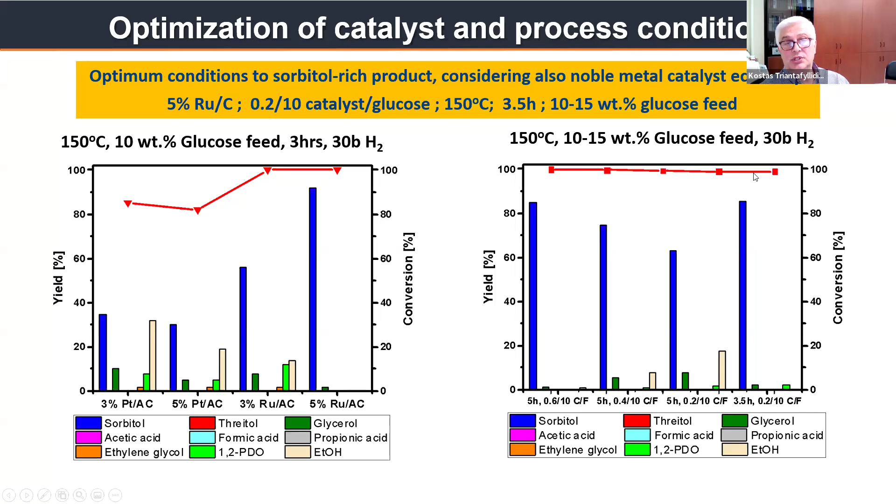Some optimization work. For example, you can see here that the ruthenium catalyst is much more selective compared to platinum catalyst towards sorbitol. Whereas with platinum catalyst, you also produce smaller glycols. And again, more optimization here, we reduce the amount of catalyst over the glucose feed, and still you can see we have high conversions, high yield of sorbitol.

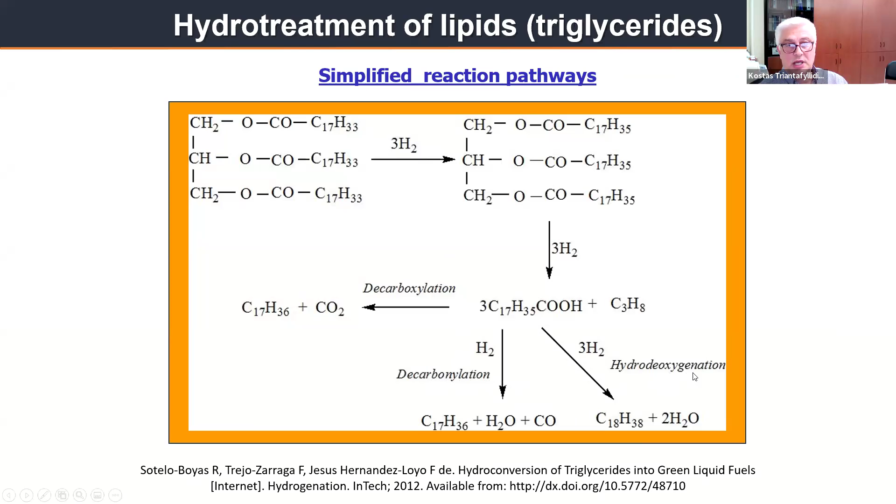Now, I'm quickly changing and closing with this, from the lignocellulosic biomass to the lipid-like biomass. And of course, we're talking about the triglycerides. We need a lot of hydrogen for decarboxylation, decarbonylation, and hydrodeoxygenation to get the corresponding hydrocarbons. And here we have been working with microalgal lipids and also microbial lipids, working on the extractions and of course developing catalysts, as I said, bifunctional catalysts and not sulfided catalysts.

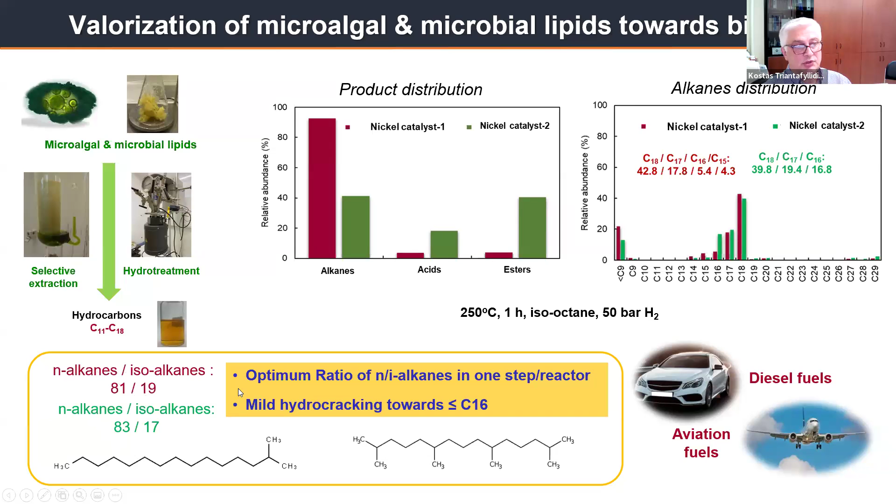For example, we have developed a nickel-based catalyst where we have about 90% and more of alkanes, minimizing acids and esters, and very importantly, with the appropriate normal to isoalkane ratio, you see here 80:20, this ratio being very important for fuel applications. Again, here utilizing our small micropilot reactor, we worked on microbial lipids during a European FlexiGreen fuel project, and we convert 100% of the lipids to the corresponding normal hydrocarbons, and then other partners work on the isomerization towards aviation fuels.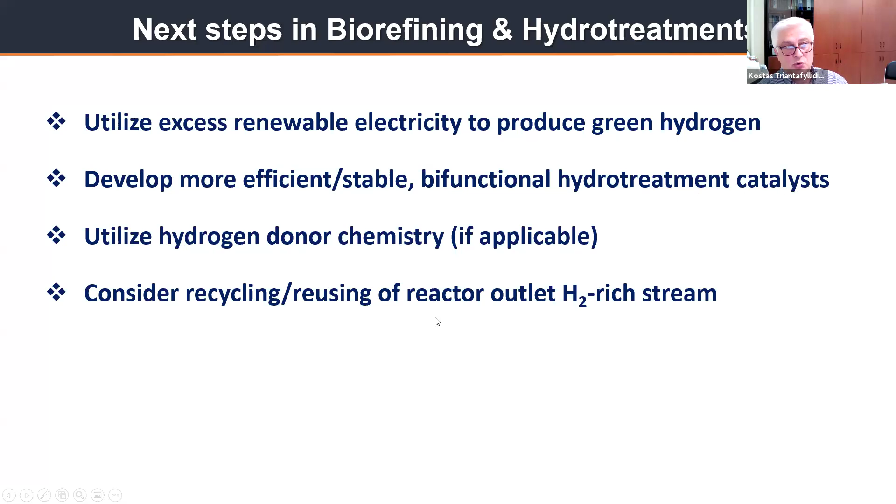Now, closing some messages about the next steps in biorefining and hydrotreatments. Certainly, we need to utilize renewable green hydrogen or other types of renewable and environmentally friendly hydrogen. Of course, we need to develop more efficient and stable bifunctional hydrotreatment catalysts. If possible and if applicable, depending on the process, try to use hydrogen donor solvents and chemistry instead of high hydrogen pressures. And something that we are working on is to consider recycling and reusing the reactor outlet hydrogen-rich stream.

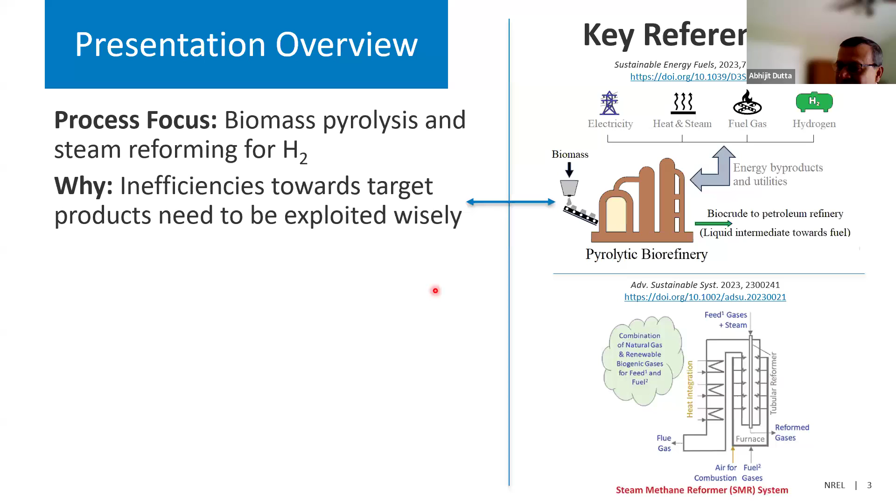Why did we do this analysis? There are inefficiencies in any process. Obviously we would like to make as much liquid fuels and sustainable aviation fuels from pyrolysis processes, but that doesn't happen because there are inefficiencies. You produce gases, you produce char, and so on. All those are also valuable, and they need to be exploited wisely to increase the sustainability of the overall

use of biomass. And so one of the key things, especially in the second part, is the off gases from fast pyrolysis and catalytic fast pyrolysis. And there's additional relevance to the analysis on the second part of it. You could use the same kind of analysis for other biogenic gases to analyze what happens if you put those gases into existing equipment for hydrogen production.

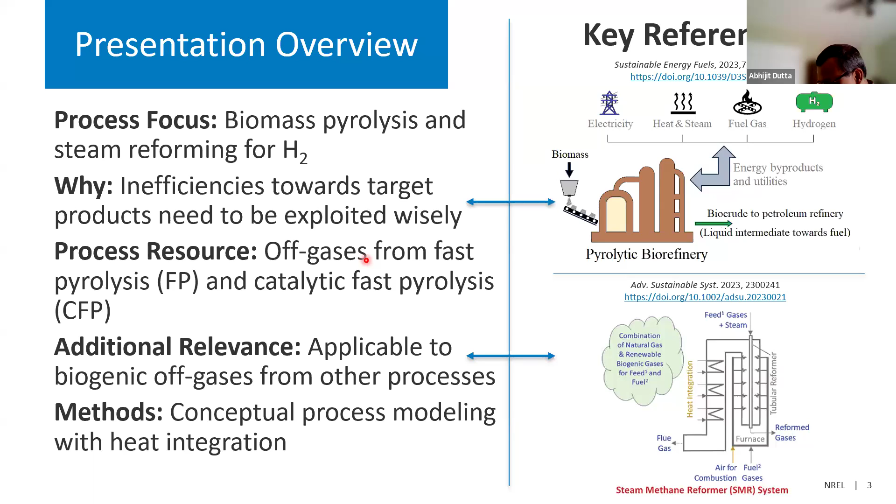And the methods, of course, are conceptual process modeling with heat integration. As I said, any analysis is subject to assumptions, so please go through the assumptions before drawing conclusions for your choice of location, etc. So the first part of this talk is on locational infrastructure and decision making. This was work that we did jointly, basically for a client.

So the question was, what do we do in this particular paper? We tried to answer, what do we do with the resources available? There are multiple options: electricity, heat and steam, fuel gas, hydrogen. You could make them from the excess energy, or you could actually buy them, like electricity from the grid. So what are the smart choices in terms of the most efficient use of biomass?

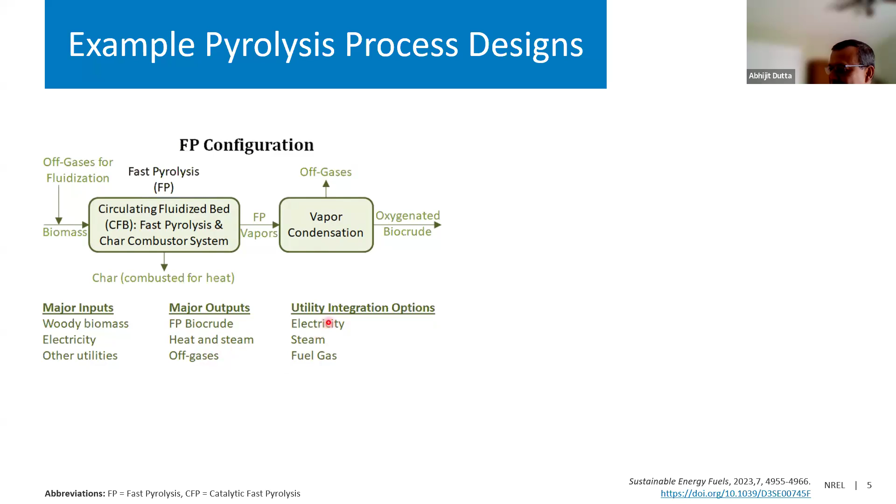In this case, as Kostas, the previous speaker, talked about, fast pyrolysis was one configuration that we looked at in this study. As most of you know, it's rapidly heating biomass at nearly 500 degrees centigrade. The major inputs are woody biomass, electricity, and utilities, and the major outputs of that process are basically the biocrude, which, as Kostas implied, can be very reactive, heat and steam, and off gases. And in terms of integrating electricity and utilities, you have electricity, steam, fuel gas.

With catalytic fast pyrolysis, before condensation, you basically put it through a catalytic bed or a fluidized catalytic system, and essentially improve the quality of that product. In this particular analysis, we also had hydrogen feeding into the front part of the process. So the major inputs, in addition to the previous case, also included hydrogen, and hydrogen can also be a product in this case. And if you look at the reference, you will see that there were some chemical co-products, acetone and MEK in this case.

So again, we are not focusing on the process itself. What we are focusing on is the utility integration options, which should carry through into other processes if you do similar analysis. If you look at a standalone biorefinery, then you have certain limitations. If you export hydrogen, there has to be a consumer locally. Heat export, there has to be a consumer; steam, fuel gas, similar gaseous exports. It's harder to transport gaseous products because of the volume. So you're limited in these aspects when you have a standalone biorefinery.

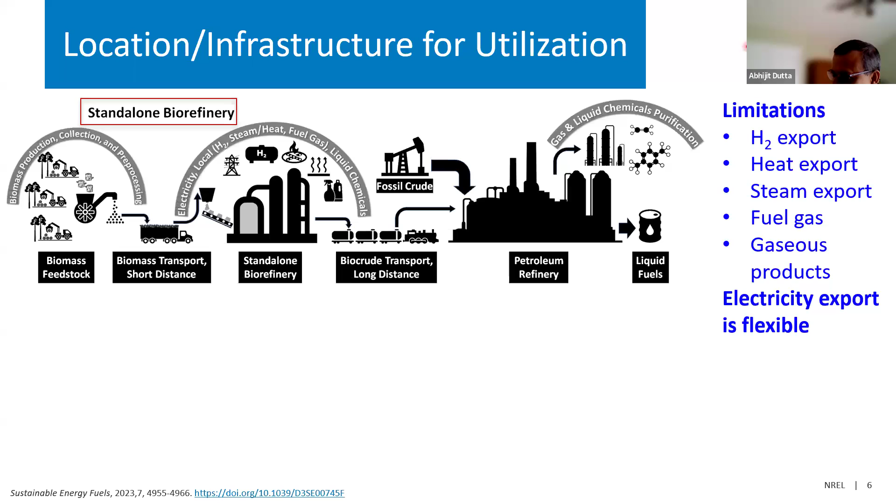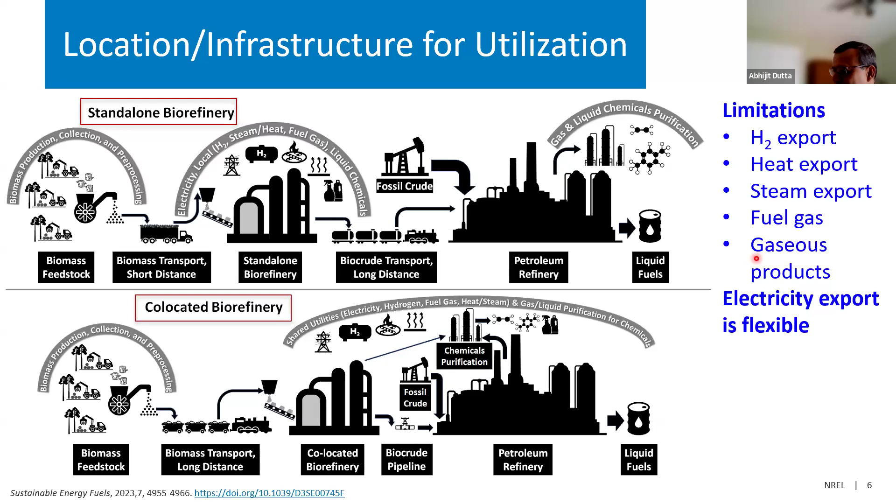Electricity export is flexible because the grid is everywhere and you are actually consuming electricity. You could put back electricity in the grid. With a co-located biorefinery, meaning producing the biocrude and putting it in a petroleum refinery for final processing, when the biorefinery and the petroleum refinery are co-located or in proximity, these restrictions that I talked about go away, so you have much more flexibility in terms of using those utilities.

This particular analysis was for a 2,000 tons per day woody biomass plant, and all the details and many other cases are shown, but I just wanted to point out two particular cases. The first one is for a standalone refinery,

and let me remove this because it's interfering with your view, I think. So I can get this out of the way.

Okay, so in the standalone refinery, as I said, electricity export is the most feasible in terms of flexibility.

So in this case, I'm showing the CFP process, the catalytic fast pyrolysis process, and it shows how much energy is going in and how much energy is coming out in the different products, etc. And the second one is basically a co-located facility with more flexibility.

In this particular case, you could be importing hydrogen, you could be exporting hydrogen, you could be importing electricity. This is a favorable case from the results. Electricity import was included, and then this particular case had export of hydrogen and steam, assuming it was co-located.

So based on that, again, to point out the assumptions, the displacement method was used for all the co-products. The main product was a liquid biocrude. So using that method, we definitely see a benefit from exporting hydrogen and steam and importing electricity for the process.

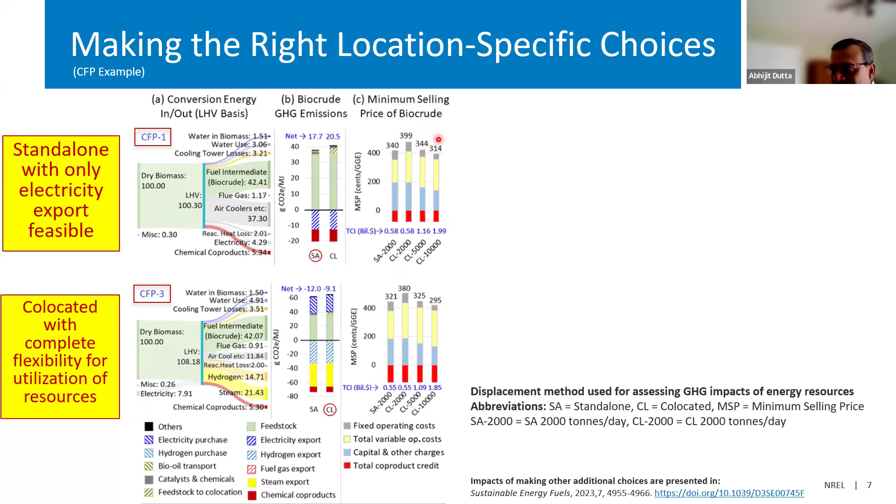And also, we did the simultaneous economics for the process. So this is the summary of these two particular cases, and again, there are more cases in the paper. You can look at that. And so these are the costs and the GHG emissions.

Moving on to the second part of the presentation. So we talk about making hydrogen. It is beneficial. What if it is co-located, and could you put that into a steam reformer, which is already making hydrogen? And can you get the benefits from less capital used in this process?

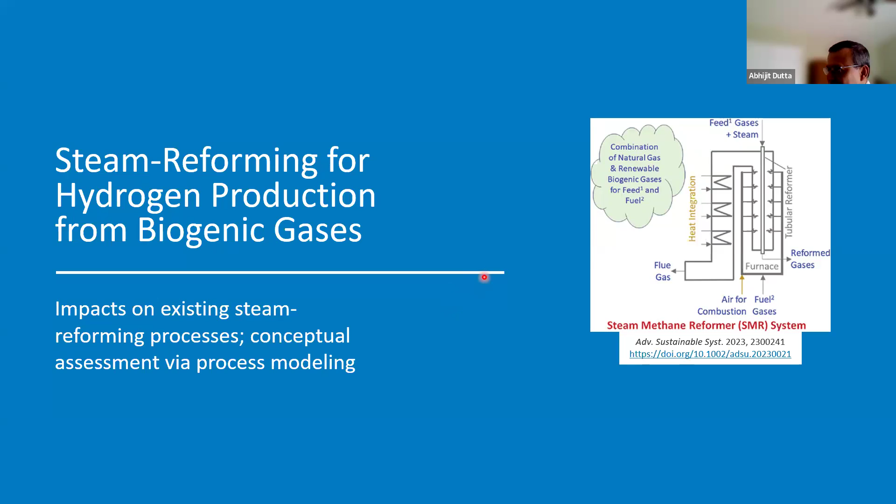So to answer that question that I had for a long time in my mind, I wanted to see what happens to the process itself. Of course, you could design a process to do steam reforming of the off gases, but what if you put it in an existing facility?

So of course, in a steam reformer, you have two sides of it. There's a feed gas and there's also a fuel gas. The fuel gas puts the heat into the process, into the endothermic reforming reactions.

The analysis included all the major equipment in a typical natural gas steam reformer. So there's sulfur removal, there's heat integration, there's a pre-reformer where you typically would take other molecules and try to make it as uniform as possible in terms of the hydrocarbon that is typically processed in the main reformer. And then there's also water gas shift and PSA to produce the hydrogen.

As part of this publication, when we got the peer review comments back, they wanted us to validate some of that. And we used an IEA GHG report to look at the base case and see whether they're comparable or not. And it turned out to be so, as mentioned in the paper.

So really what we are trying to see is how the key metrics start moving as you put pyrolysis gases into a natural gas reformer. Again, the composition of the pyrolysis gases assumed is in the paper. Really, we want to look at the key metrics. So CO2 emissions, that's our primary interest. How much does it move? How much of it is biogenic?

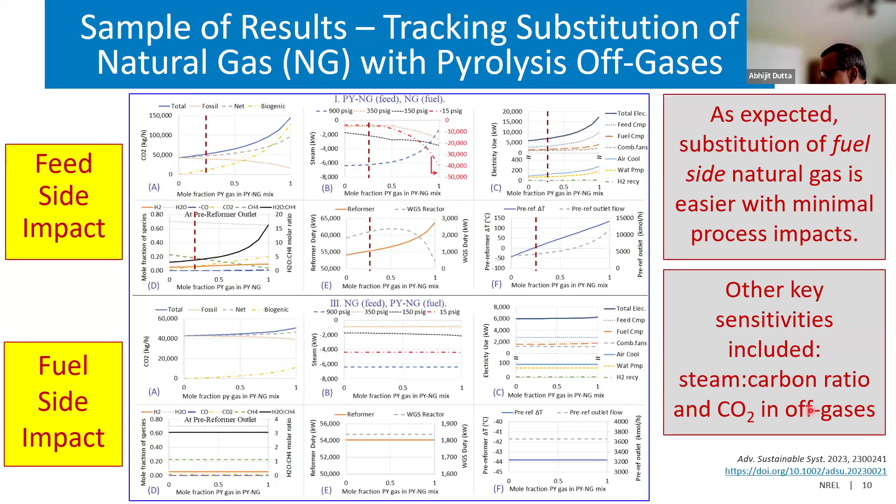And then other key sensitivities in this study I'd like to point out is the amount of CO2 in the off-gas composition, and you could have a lot of that in, say, biomethane and stuff like that. So you could use that. Those kinds of sensitivities are reported over here, and also steam to carbon ratio. And I'll talk about that in the next slide.

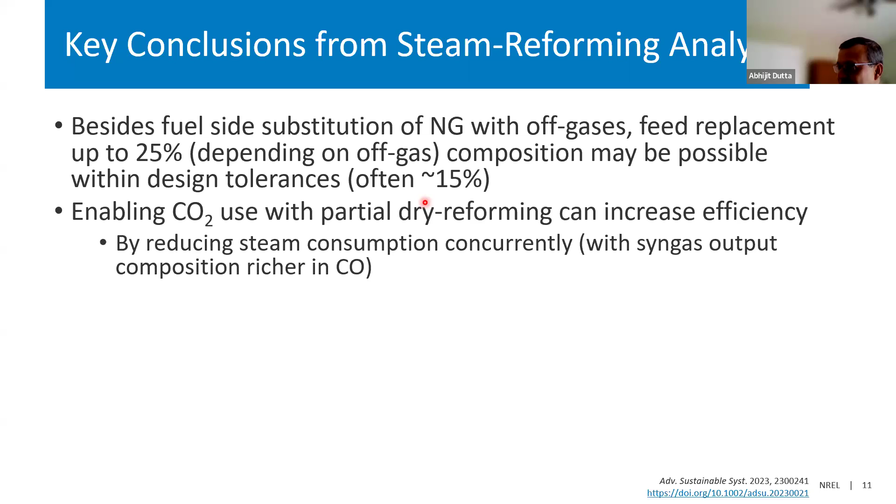So as I mentioned, you could put in 25% on the feed side within design constraints, and on the fuel side, you could go 100% without much changes. Then enabling CO2 as part of partial dry reforming could increase the efficiency, because you could put in less steam, and then that efficiency would increase, but then you would produce more CO in the process, and that might be beneficial if you're doing syngas conversion.

Pre-reformers: if you take this kind of strategy, then your pre-reformer will play a critical role, because there are many gases and pyrolysis gases, as Kostas mentioned. Pyrolysis products have many compounds, and those could be homogenized before it goes into the main reformer, if you have a pre-reformer doing its job and converting those into typically methane and other gases.

And then a caveat, of course: this is a process model, and for an industrial implementation of this, there will be other considerations like corrosion and safety. There are supplier design guarantees and stuff like that. So yeah, all those have to be considered. And as I mentioned, this analysis can be applied to other biogenic gases.